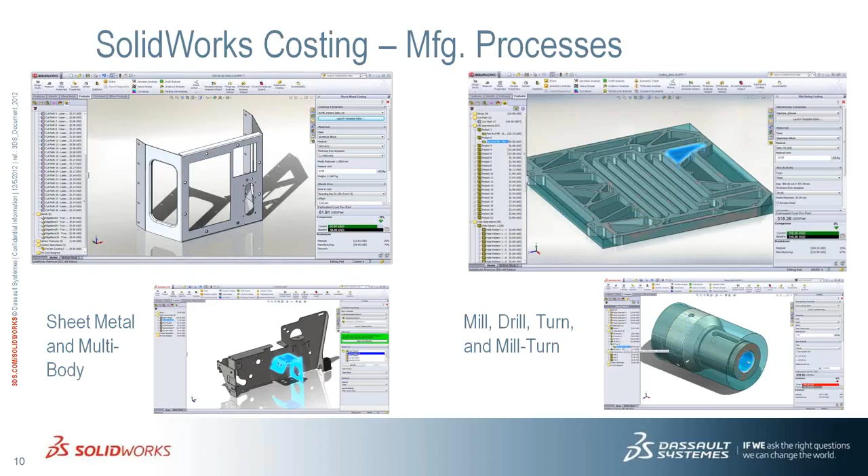So anybody who creates sheet metal assemblies, assemblies that are made out of multiple sheet metal parts, you can cost that. Or if you combine machine parts and parts that are plate parts and parts that are sheet metal parts, you can cost those parts all at once also. So multi-body costing is also available. On the other side, there's milling and drilling, and there's also turning and mill turn. And so turning and mill turn were added in 2013, as well as multi-body. And also, we have expanded the capabilities of machining.

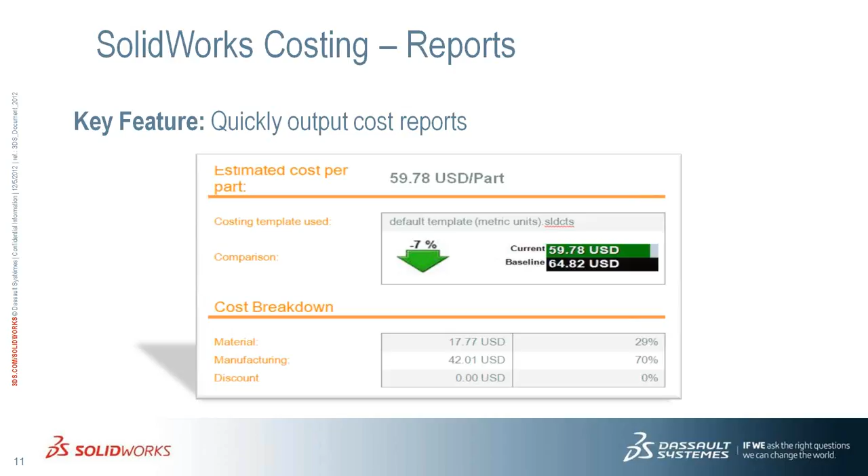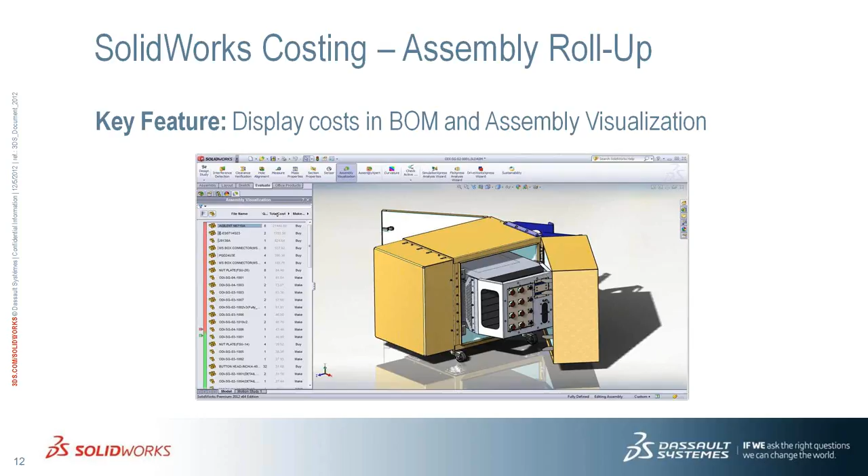Okay? So basically, what are the outputs you get from costing? You can output reports. As I said earlier, you can output Word documents that can act as quotes, so you can save them as information about your design. You can also roll up the costs either in a bill of materials or an assembly visualization in SOLIDWORKS. So you can have cost as a parameter or as a property in your bill of materials.

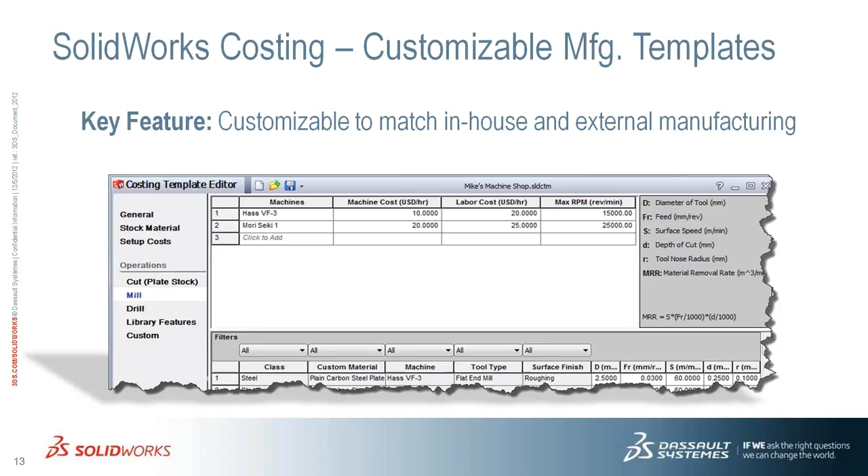As I stated earlier, costing is customizable. It's driven by manufacturing templates that look like spreadsheets. And I noticed about 40% of you said that you currently use spreadsheets to cost parts. Well, that's great, because we base costing on spreadsheet-like technology, except what we do is we extract all the geometry information and then plug it into a spreadsheet. So we find how many holes there are and what size they are, and how big a pocket is and how much volume that pocket has, and we plug it into your spreadsheet, basically.

So let's get right into a demonstration of SOLIDWORKS Costing. So on the screen, I just have a typical SOLIDWORKS sheet metal part. I'm sitting here in 2013, but SOLIDWORKS Costing also runs in 2012. And I want to cost this part. You see this part's made up of typical sheet metal features. I've got flanges, I've got some punches, I've mirrored some features, I've got some regular cuts, I've got a hem feature, and I've got a base flange in there. All right, very typical SOLIDWORKS sheet metal part. Now I want to cost that part.

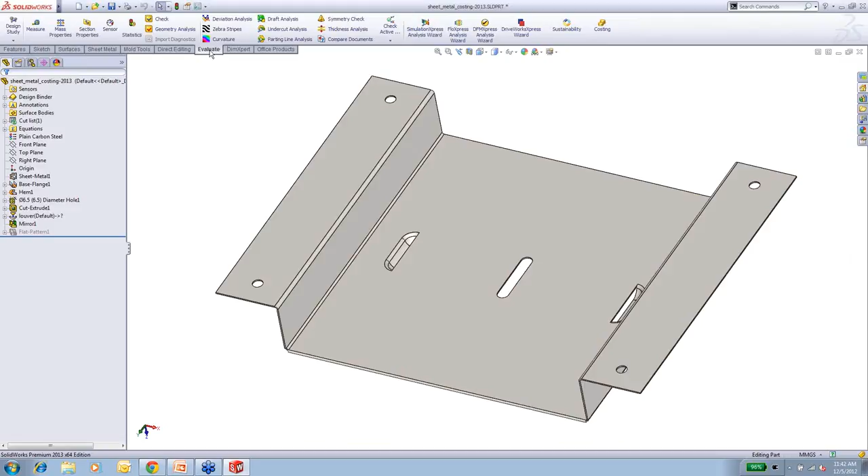Under the Evaluate tab or under Tools, either way, you can hit Costing. And when you hit Costing, that's it. SOLIDWORKS automatically goes in and costs your part. Now the way it does this is, if you look on the right here, there's what we call the costing template. And basically think of the costing template as being kind of like your selection of what factory you're going to run it in or which machine you're going to run it on.

So in this case, I'm going to run this part at my favorite sheet metal shop called Fabulous Fabrication. And I'm going to click on that. And you see that my cost right now is about $12.73. It gives me some feedback. It says this part is a steel part.

It's plain carbon steel. The thickness of this part is such and such because it's pulling all that information from the model. It tells me what the cost of the material is currently. The cost of the material here is $3.35 per kilogram. It's telling me how it's calculating the blank size. So let's look at that blank size, okay?

So if I look at the blank size on this part, typically by default people would take what we call the bounding box of the part. But you can also look at it in different ways. You could look at the flat pattern of that part. You can type in a custom sheet size or a custom area. So let's just go back to our bounding box.

Most manufacturers will know you add a little bit of space between your parts if you're cutting them in a laser or something like that. So I'm going to add about a ½ inch here, or 12 millimeters. That adds a little bit of cost to my part because it added a little bit of material. So you see down below my cost went up here. I went from $12.73 to $13.02 because my material cost increased.

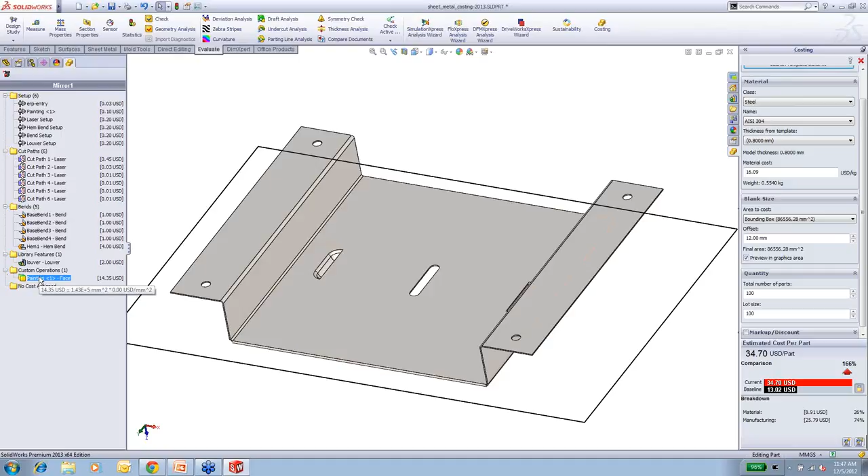So what's another option here? Maybe I can reduce that cost by picking another material. So let's go with stainless steel, for instance. Well, initially my cost went up, but remember, with stainless steel, I don't need my painting operation anymore, so I'm going to remove that. And in reality, my cost comes down. So originally that cost was around $34. Now it's come down to about $20. So I'm actually below where I was when I started with the plain carbon steel part.

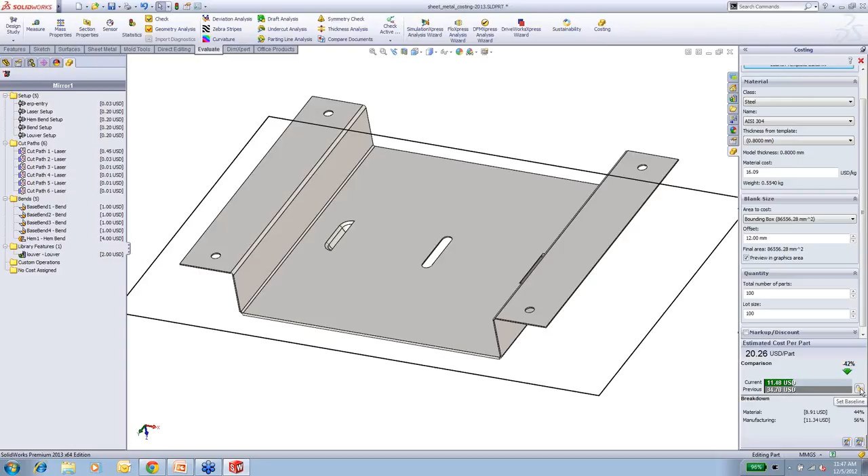Okay? So that's how you can use SOLIDWORKS Costing to drive the decisions you're making for what you're going to do to the part. Let's set another baseline here. Let's say we're going to save where we are right now, and ask what's going to happen to my part if I make a design change. So let's say I had to increase the length of this part to 400 millimeters. What happens? Well, of course, the cost goes up because both my manufacturing costs and my material costs go up. So the cost of that part went up 24%.

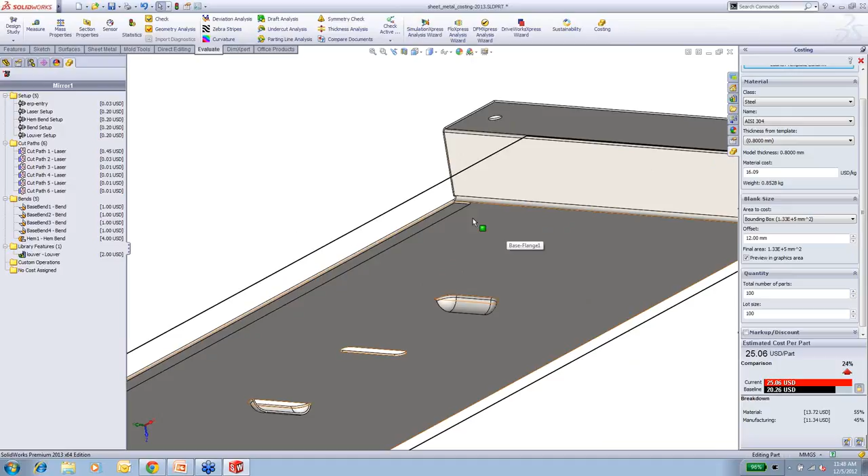All right? But I want to recoup as much of that cost as I can, or get it back to where it was before. So maybe I say, well, what can I remove from this part? Maybe one of the things I can take out is this hem flange right here. That's a pretty expensive feature. It's $4 for that hem. So I'm going to take that hem out. I'm just going to suppress it. And you see right away that cost comes down. And now I'm at about 20.46. I'm basically where I was when I started this whole process. And if I want, I can continue to take geometry out, or change geometry to bring the cost down. So you get the idea of how this works.

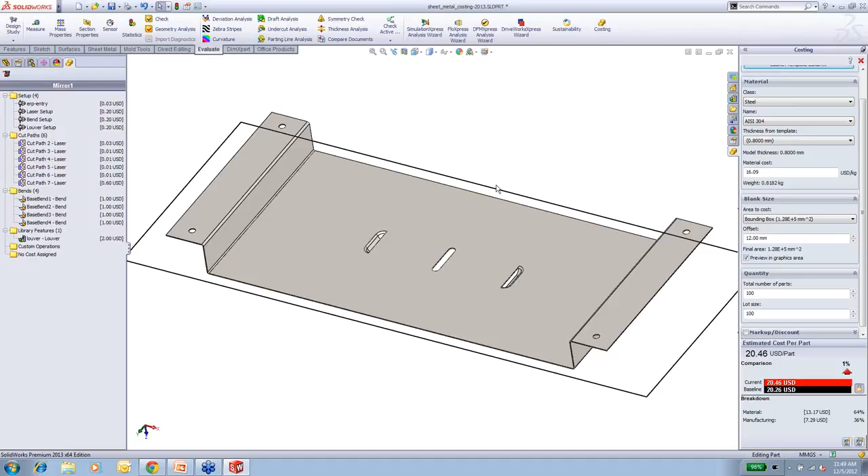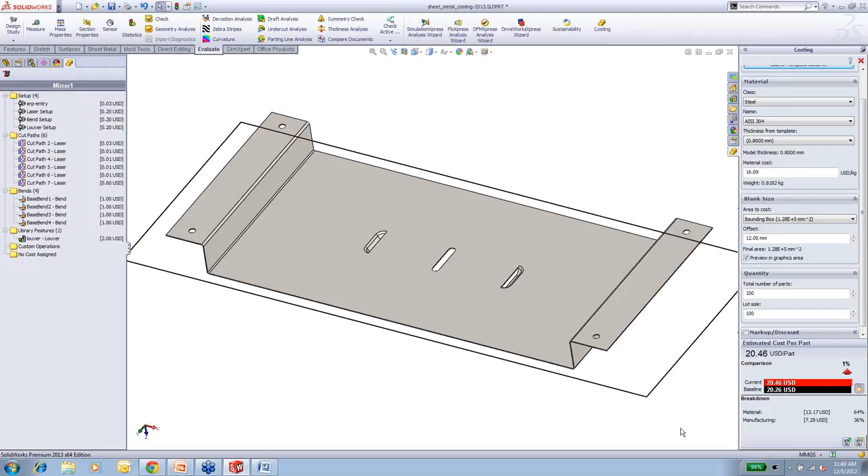Now you can also output this information. So down here I'll create what we call a cost report. This cost report is a Word document, the template of which can be customized. So you can add your company logos. You can remove any information that you don't want to see on this document. And you can use it as a quoting tool, or internally as a tracking tool as a designer to see how your changes affected cost over time. And you can even save this in the design binder in SOLIDWORKS.

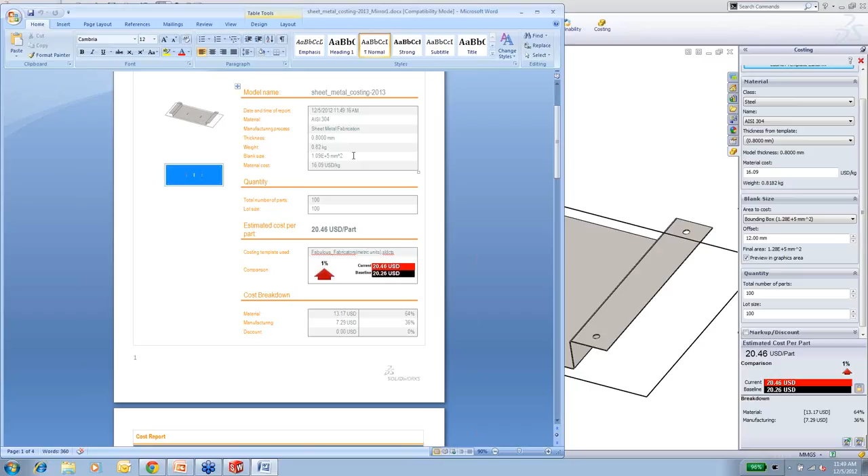So here you have your information. For instance, you have the name of the part. You have the name of the template that you used: Fabulous Fabrication. How many parts I'm costing. What the blank size is. And then it has detailed information about each one of the cuts. How much cost was in cutting, how much cost was in bending. And you always have the images there to let you know what the part looked like at that state. So this is a great way either to save information about costing or to actually return a quote to a customer. Okay.

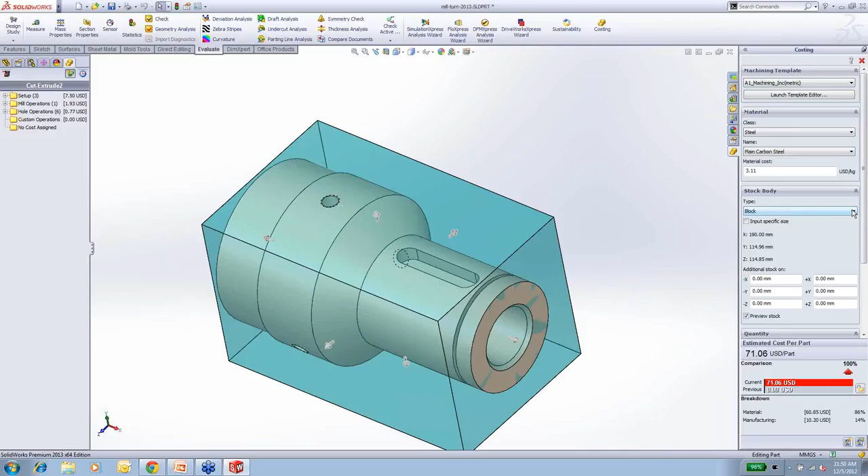Now, besides sheet metal, we also have machining. So let's take a look at our machining capability. We'll bring up this part right here. I've got a mill turn part. This is, again, new for 2013. We added mill turn capability. When I go in and cost that, initially it says it's using A1 Machining Incorporated as my costing template. Again, that could be one of my customers, or one of my plants in my company. Initially, it says it's going to run this part with a block piece of stock, but I can select either plate or cylindrical stock.

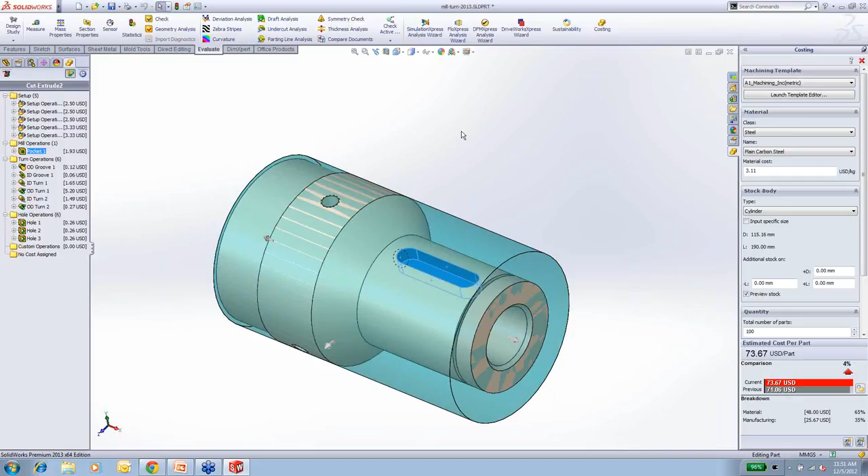And when I select the cylindrical stock, it's going to run turning, milling, and drilling operations on that part as it sees. So when I open up that process sheet, you see that I've got an OD groove operation, an ID turning operation, OD turning operations, and even a pocket milling operation here. So this would be a typical job shop mill turn part that you would run on a mill turn machine. All right. Another type of machining is just straightforward milling and drilling. Let's look at another part for that. Just a typical block type part, right?

So now you can simulate a milling operation that's done. You can actually access both the top and the sides of the part all at once. So you can have 5-axis positional capabilities. All you have to do is eliminate the setup operations that you have there.

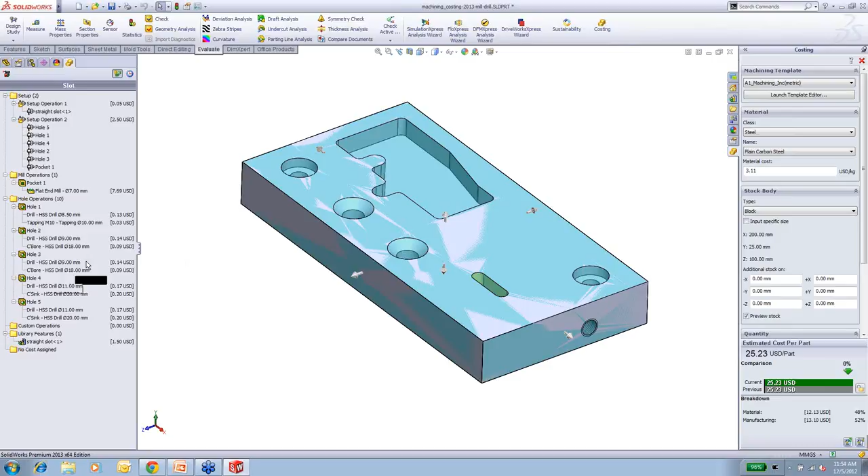Okay, so let's get back to the PowerPoint here. We had our next question. Now that you've seen what costing can do, I just wanted some information. There are some things here that we can't do, which we're probably going to look at in the future. Can you pick 3 or less? Don't pick any more than 3, please. Pick 3 or less manufacturing processes that you are most interested in costing. So what are the ones that you're most interested in? So please pick 3 or less.